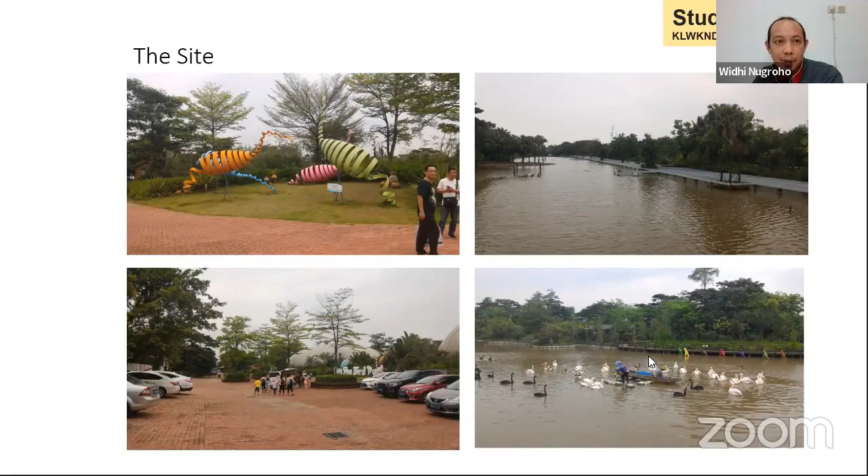So the design idea comes from the bird itself. I'm thinking about how to represent the building and the site and the bird park at the same time. So the design idea is transforming from two birds hugging each other, and these two birds symbolize the good relationship between Indonesia and China, because the furniture, the craft come from Indonesia but are shown in China.

So I'm thinking these two birds become one, one unique building shape. So you can see the transformation of the design idea. And this is the initial design sketch form. We try to start with the sketch, so we can see how big the building is, how many stairs, something like that.

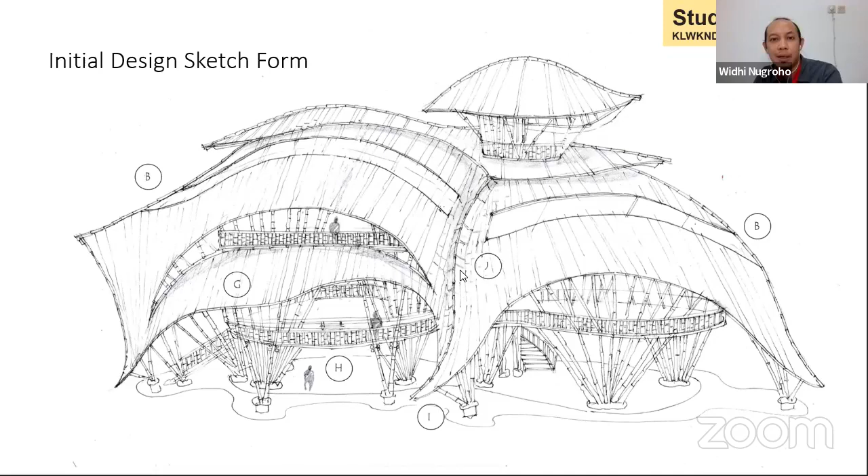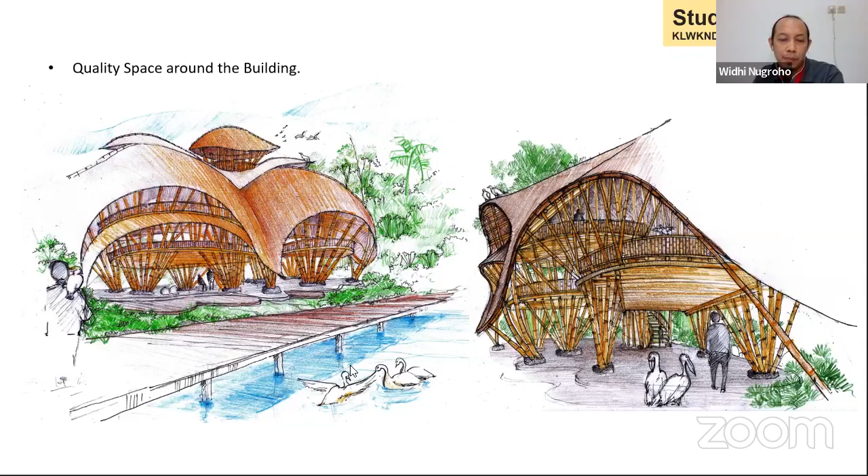And this is the rendering sketch model. You can see the hugging birds become the building design. In this sketch, you can see the staircase directly into the second floor. We made some sketches to see the quality of space around the buildings. Basically the building is beside the lagoon, very close to the water, but we have enough distance between the water and the building.

And this is the second floor. The main entrance goes directly into the second floor. You can see the furniture layout here. This is the tower in the middle with the staircase around it, and this is the balcony, and you can see the furniture layout with the floor patterns on it.

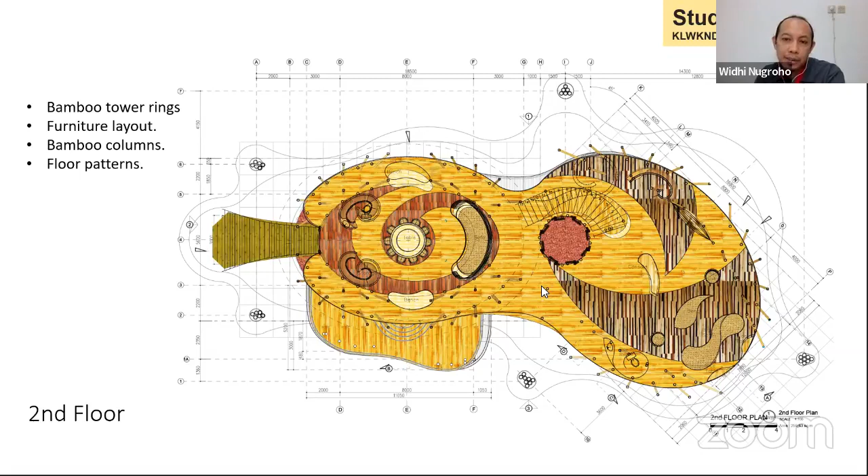So these are the sections. You can see how big the building is. The top is about 21.5 meters, and you can see the staircase into the second floor, and in the middle is the tower. In this area, the staircase is outside the tower, and in this area, the staircase is inside the tower. You can see the human scale here.

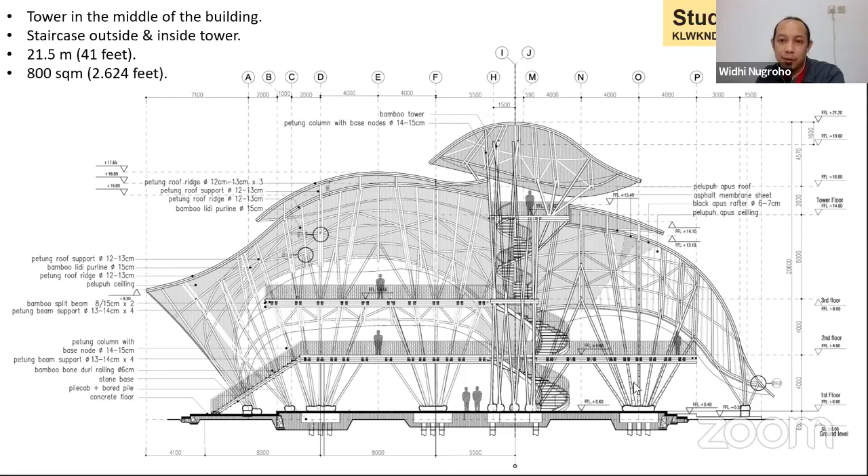We have a structural analysis also, and in our design team we have a bamboo civil engineer, a bamboo specialist. He calculates all the wind load, earthquake, and also the building load itself. This building is designed to withstand wind of 120 kilometers per hour. So it's quite a strong structure.

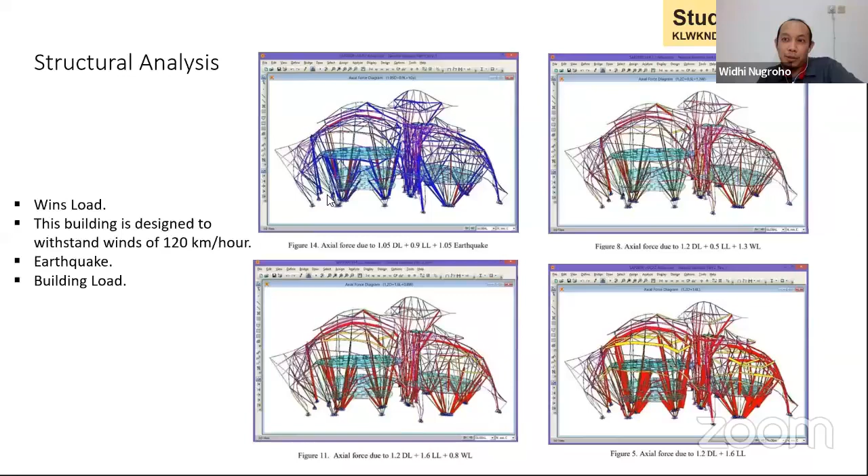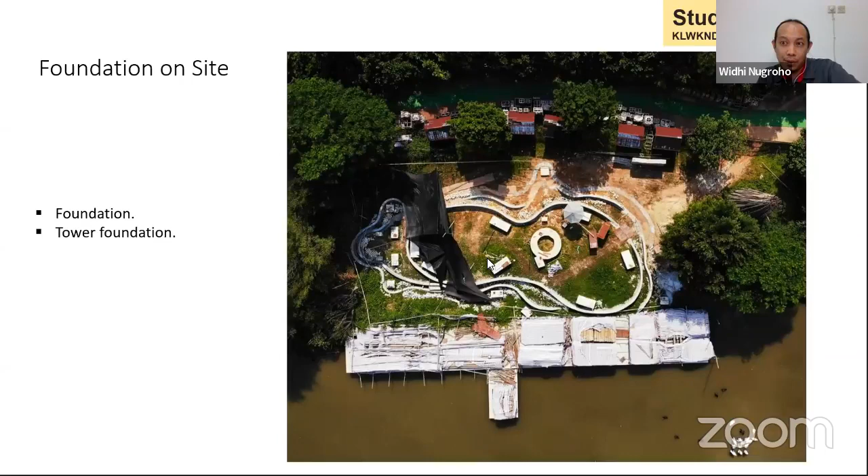Yeah, these are the foundations on site. So you can see the foundation tower in the middle, and this is the floor foundation. It looks very organic, and this is the construction process.

Yeah, I think the construction process is a very interesting part, and I would like to show you how this building started from the first until finish. So they start from installing the split beam here, and after that the columns. Usually in conventional building we make the column first, and after that the beam.

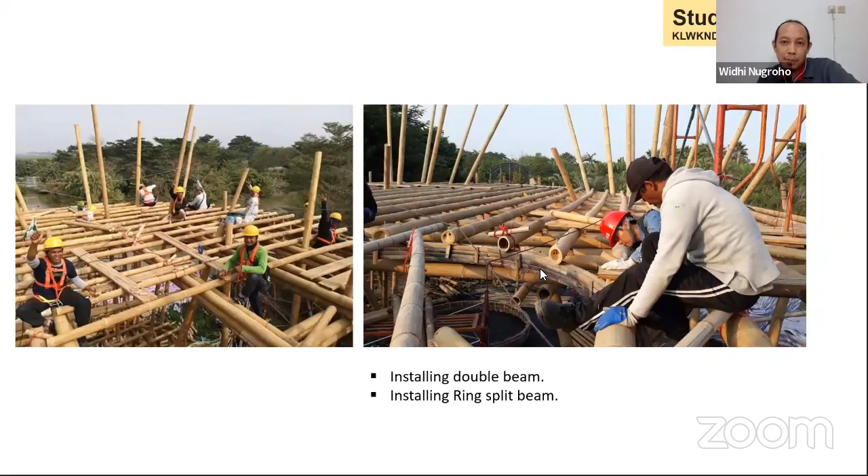But in bamboo construction we use a split beam first, and after that we install the columns. So this is the column, and this is the split beam. It's a double beam. Yeah, it continues with the columns. This is the worker installing the roof support beam.

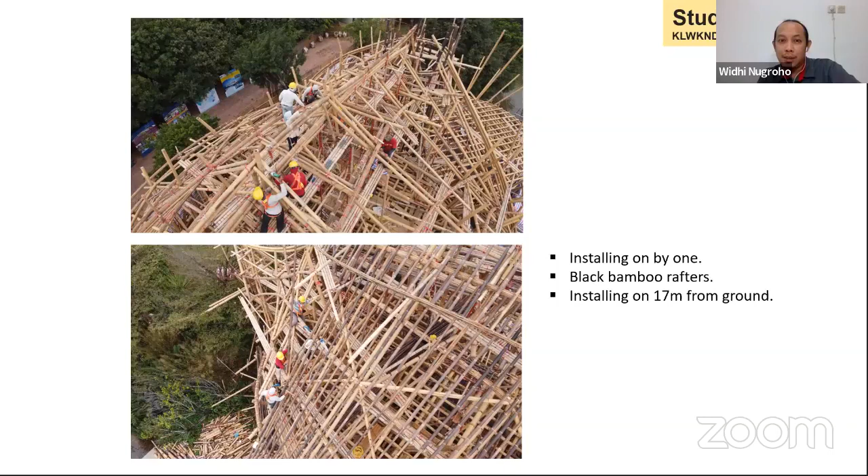Yeah, you can see this building is very high, 21.5. So yeah, at this point it is around 17 meters from the ground. So you can imagine how tall this building is, and there are no special tools to erect these buildings, just manual, one by one. And yeah, you can see the backbone of the bird, this, and these half structures.

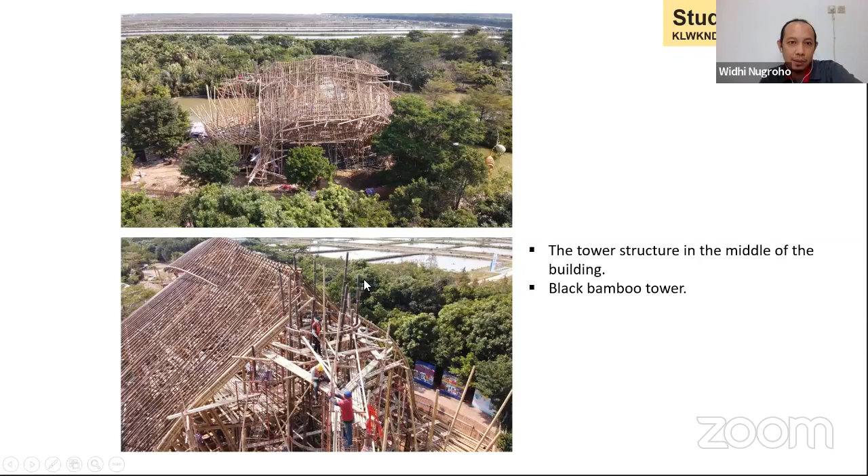So you can see that the tower in the middle starts to be constructed, and we use a black bamboo structure in this tower. And yeah, this is the top of the roof. This point is 21.5 meters. And yeah, this is the bird's head.

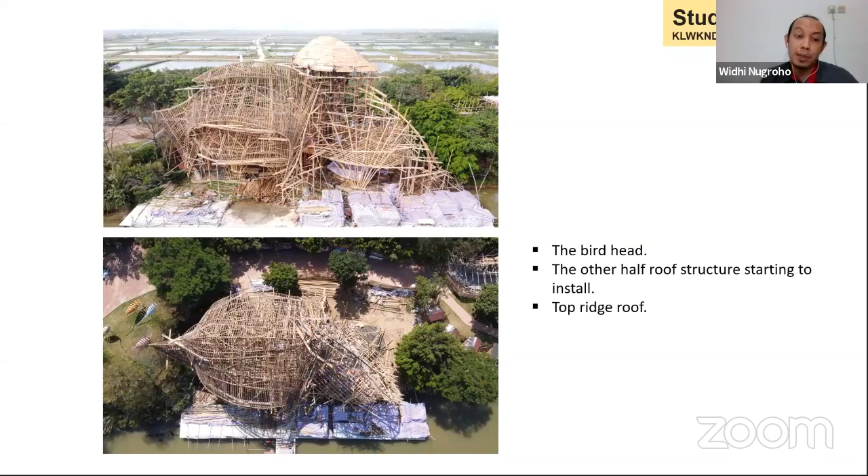And we have a double roof because we try to reduce the wind load when the wind flows into these buildings. So the jack roof is our design to reduce the wind load. Yeah, then it starts for the roof. We use a bamboo roof, and this is the roof rafter structure when it's complete.

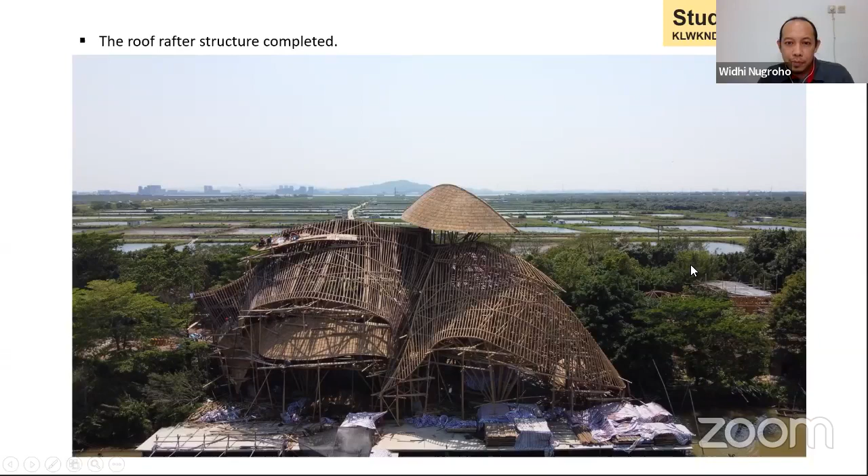So you can see around this building. This is when the bamboo roof is complete with a skylight. This is inside the building. Bamboo skilled workers start to install the roof finish, cover, and the skylight. You can see.

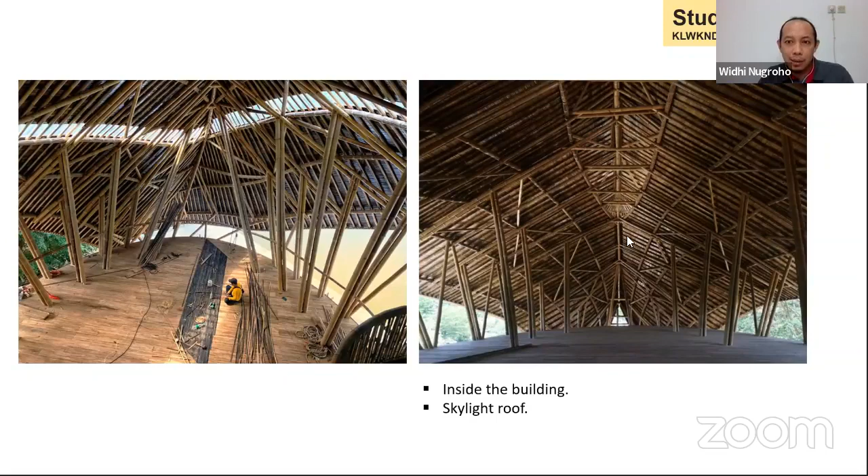5 minutes, Widhi. Thanks.

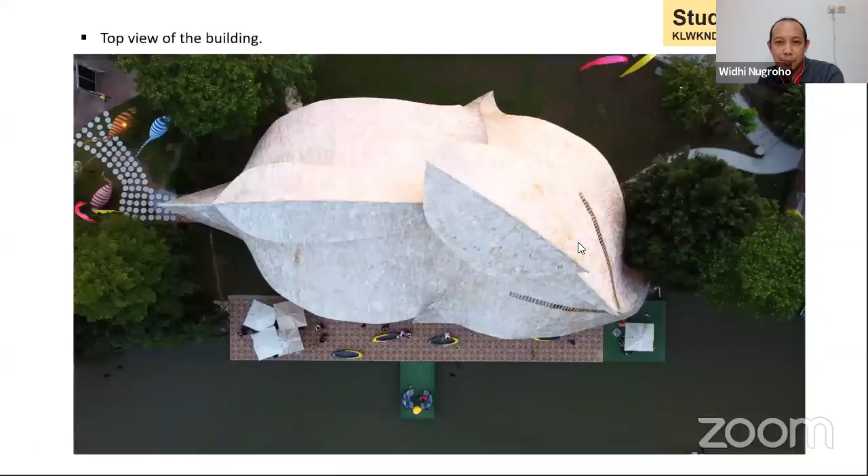Okay, this is the finished construction. Yeah, this is a different side of the building. This is the bird's eye view. It's the top, so we can see the shape of two birds with one head on the top. Yeah, this is the entrance into the second floor. And you can see the staircase around the tower.

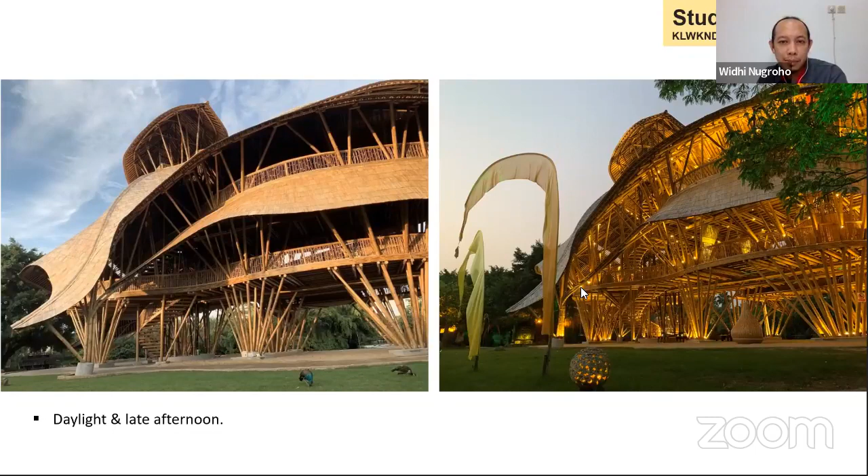Yeah, this is the difference between daylight and late afternoon. We played with simple lighting for these buildings. Yeah, a big roof, because we need to cover all the bamboo structure from direct sunlight, the rain splash, and also to reduce humidity. We use a sun floor here at the ground floor.

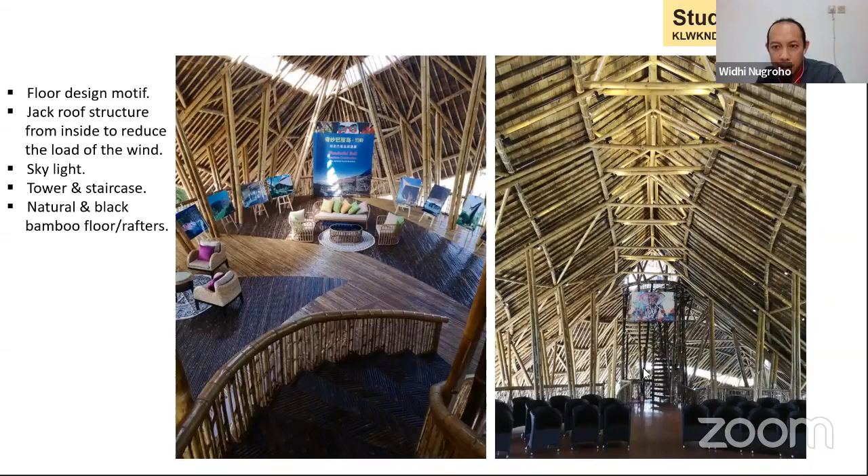This is the inside of the building. It's the jack roof, the tower in the middle. This is the floor design motif with black bamboo inside. That is at night with the full moon.

Yeah, talking about the future of bamboo architecture, I think there are some notes from me. It's easy to use and low tech for remote areas. I mean, bamboo architecture needs no special tools, and can be used in remote places or in situations of natural disaster. I mean, in the Southeast Asia context, because there are a lot of natural disasters in Southeast Asia, and I think bamboo can help us build our new environment after a natural disaster.

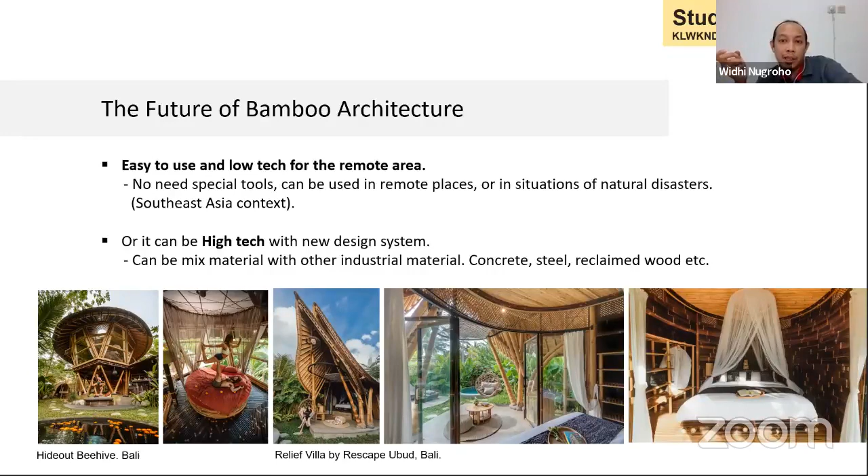Or it can be high tech with a new design system, and can be mixed with other industrial materials like concrete, steel, reclaimed wood, or any other materials. And also the durability. A good bamboo preservation system that is more economical, inexpensive, and easy to buy. Because sometimes the boric acid treatment is quite difficult to get. Yeah, I hope we can get it more easily.

Maybe there will be a discovery about a bamboo coating resistant to the rain, direct sunlight, and also termites. And bamboo buildings need to be easy to maintain, with a simple design with emphasis on function, smart design bamboo buildings. The building can be mass produced everywhere and affordable. To reduce the building costs, we can mix materials, like I said. We can use local material, local bamboo. If you have a garden, maybe you can build your own house.

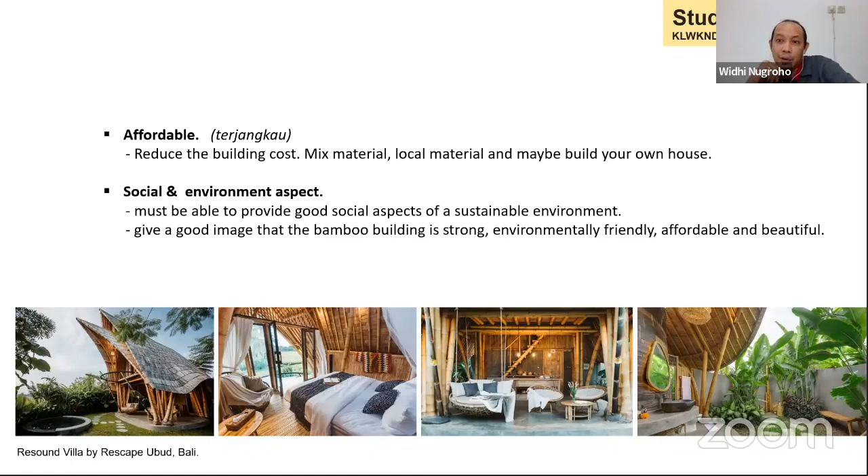And yeah, also the social and environmental aspect: it must be able to provide a good social aspect of a sustainable environment, and also give a good image that bamboo building is strong, environmentally friendly, affordable, and beautiful. Yeah, thank you. Thank you, Eugene.

Thank you, Widhi. Yeah, thank you for that. If you can stop sharing your screen, that'd be great. Yeah, I'm stopping. Sorry. That's okay, no problem. We are not in a hurry. We have got all the speakers. I think we have Jamie online as well, waiting. We have Markus and Mauricio as well. So that's good. You cannot unshare, yeah? I don't know how. I mean, I have a problem with this. Okay, I'll see if Yao Sheng can do that. Yao Sheng, can you unshare? Help me? Yeah.

While we are waiting for that, it's really good to see a building, and quite a big building. It's 4 to 5 stories. And Widhi and his team from Bali managed to build this in Guangzhou, in a bird park. I'm sure you have a lot of questions. For the audience, please put that in the chat and we'll filter that as we go through the 4 speakers and try to answer your questions.

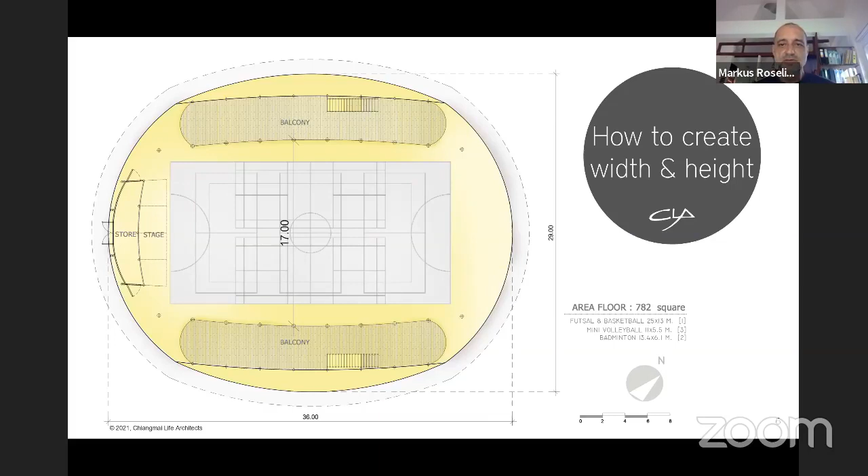At that time, in 2016, we looked all around the world at what others have done. For us, it always starts with function, a very conservative way to look at architecture. Function always comes first. And for us, science is an important aspect. I'm a doctor of natural science, it's in my blood.

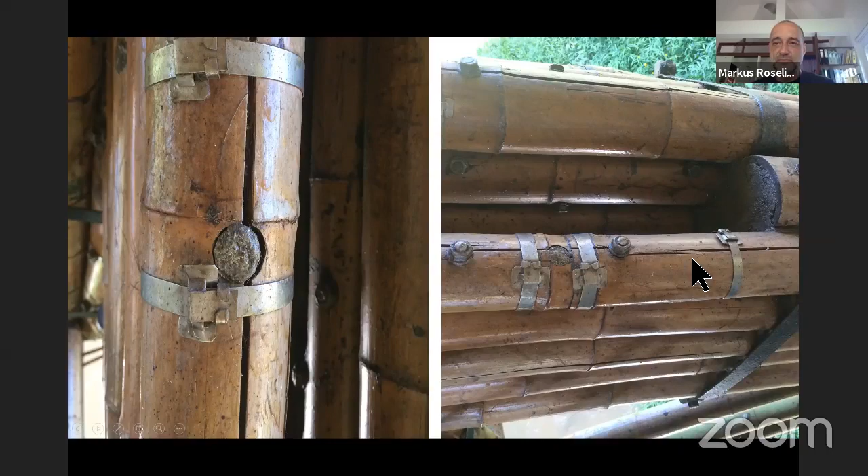We saw basically the same happening there. Whenever you do this kind of connections, the bamboo will crack, and after some time, it will look something like this. And so for me, aesthetically and also from a structural point of view, this was rather unsatisfying.

Don't get me wrong, I'm not saying you cannot build with big bamboo, and all those people who build them, sure, they have developed other things, they go further, but my way of looking at things is just different. Also because I am not so much a square guy. I don't really like little boxes and square designs.

And I was sitting in this blues concert one day with great music, but a terrible acoustic. So I looked up and I saw that building was made with steel trusses and had a metal sheet roof. That's why the acoustic was so bad. But when I saw this, I thought, that's a way maybe we could go.

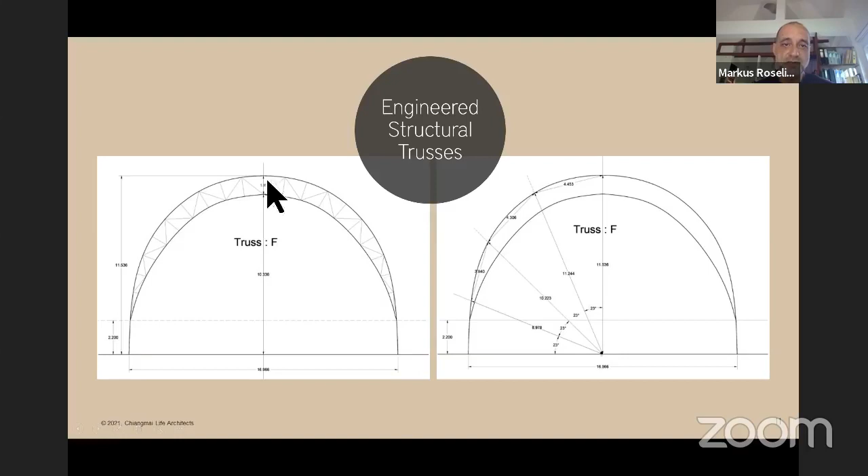So I asked my structural engineer, what do you think? And he said, yes, the main question here are these round beams. How are we going to do these beams to make this really strong and withstand all the shear forces? So we came up with these bundles. We bundle bamboo, and then we connect it with bamboo dowels in all kinds of different directions.

And we have this kind of bamboo here in Thailand that has a very small hole and is mainly built of fibers. So bamboo, as you know, comes in two different kinds of forms. One is a tube with a big hole, and the advantage of a tube is like any tube, it's hard to break, it's hard to bend, it's a very strong form. That's why most steel structures are made in kind of a tube form.

So like this, we get around the problem of the connection where all the force is only in the end part. Because with the big poles, the end part is a thin bamboo wall that can split longitudinally very easily because the fibers run longitudinally. But if you connect them the whole way, then the force is distributed on the length of the poles themselves the whole way.

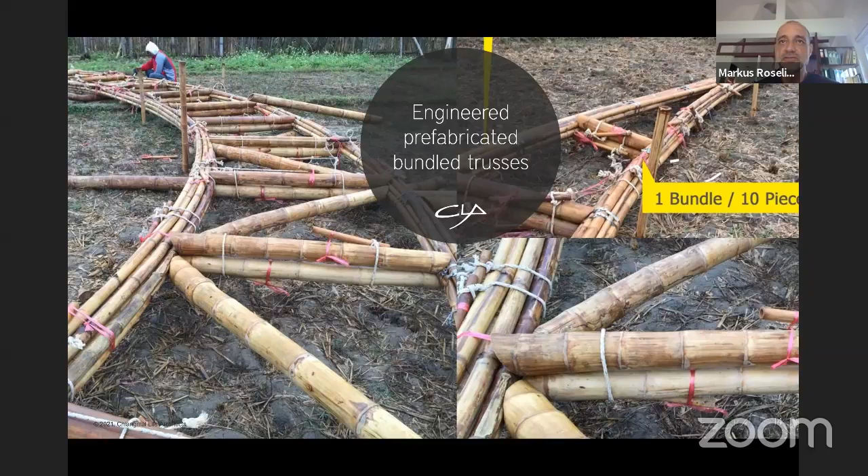12. And that's when the whole thing started, when we really realized what we were onto, because suddenly everything became understandable, reproducible, and explainable to everyone. And as Vidi also said, of course, he had to take into calculation wind forces, earthquakes, the load of the building, and all that.

And once we knew it was workable, we started looking at how do we put these trusses together? What kind of trusses, the size of the trusses, and then how to put the roof on top of these trusses. Also always thinking about the human scale, that we would need these balconies on the side.

And because this was a huge leap of faith taken by the school and by us into a construction method that hasn't been done before, we engaged another engineer to recalculate and look at this again, Esteban Morales Montoya from Colombia, who has done a lot of work for Simon Velez, a very experienced engineer with bamboo, just to make sure that we have two different opinions.

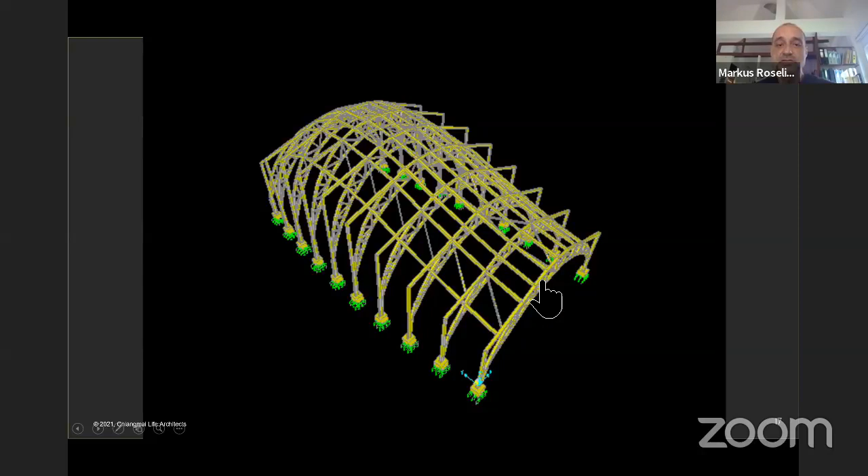And he then came up with, for example, this wind force simulation to show the maximum displacement that can happen and all these things. So we had a lot of data in the end that showed that what we were up to was most likely going to work. And then the design process could start.

And we like to design organic forms. We like to use nature as a guideline. And because it is a Buddhist school and the lotus flower plays a big role in explaining things in Buddhism, we used that as a starting point. And we put it on the side, and then we put the leaf flowers back into space to come up with the shape of our building.

And then we put this into the computer and looked at how this will flow on top of the building. And here you can see the outcome compared to the initial thought. We were getting pretty close.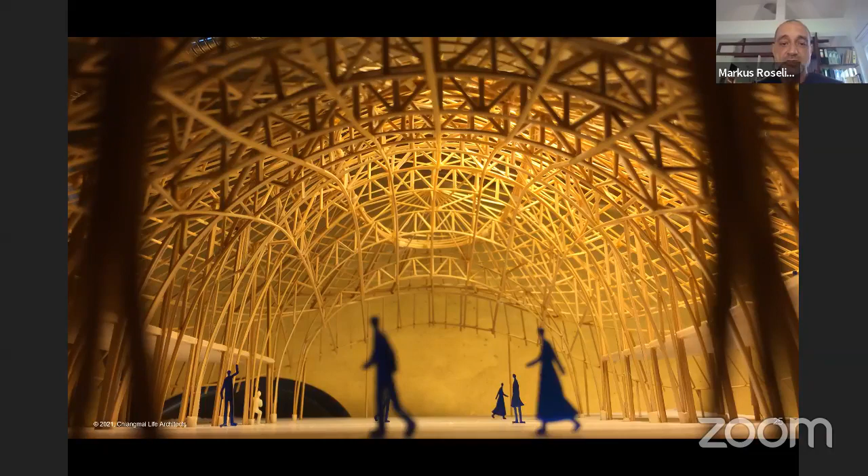Then, of course, like Vidi said, you need to make a model. There's really no way around the model. It will explain everything better to ourselves. You can find the weaknesses, and ultimately for construction, the 3D view of what you're going to do is very important. And in the model we could also explore more the human scale and see how this was going to work out in real life later.

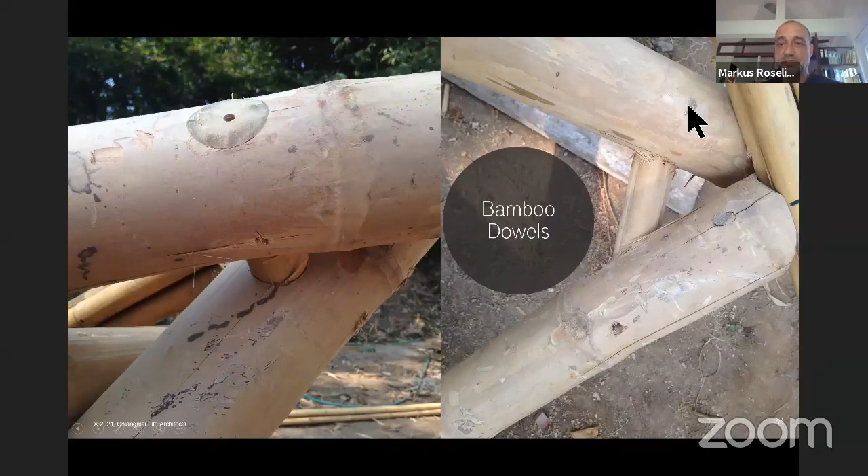So with the construction, we first produced all the trusses on site. And we used bamboo dowels, sometimes bigger dowels, and then these bigger dowels would be locked into place with some smaller dowels here. And sometimes we had to use some steel cables where the force would bring the trusses apart very strongly.

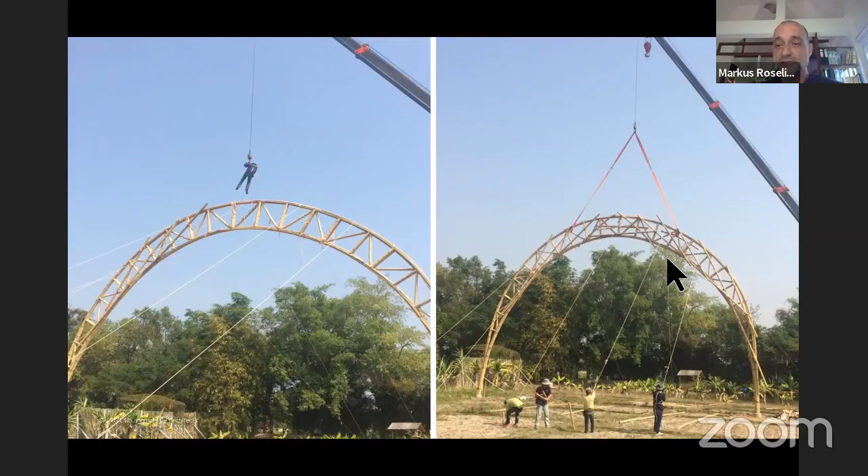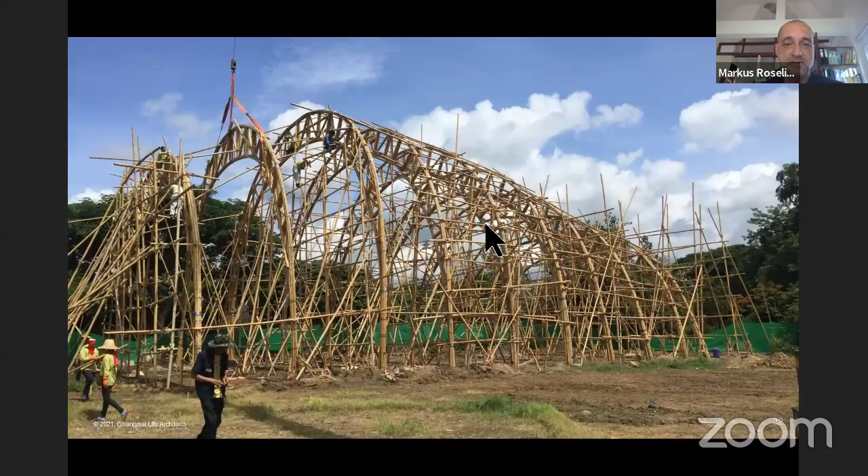And then cranes, and while we started doing our first crane lift, we realized that the trusses would bend a lot, so we had to reinforce the trusses just for transportation. Then they would be lifted. We prepared structures to hold them in place before we could connect them. And while we were putting them in, we connected all the trusses longitudinally to hold them in place. And then once it was done, there was a lot of bamboo going around.

When the structure was finished, we could start putting in our flowing roof forms and see how this would come together. So this is the base structure for the roof. And here's the outcome. As you can see, it is used as an assembly hall.

In the middle is a sports floor that is also made from recycled tires, little rubber balls, with a finishing on top that gives it the same color as the rest. We always look at being as sustainable as possible. In the back, you see the stage. The stage can be lifted up, so there is a safer environment if sports are being played.

And here you can see the height of the building. It's, I think, about 17, 18 meters high. The whole building has, I think, over 900 square meters floor plan.

Here are the stairs going up to the balconies where you can watch from up there. Here in the back, you see one of those balconies, and then you see the opening space between the first and second roof layer is quite big.

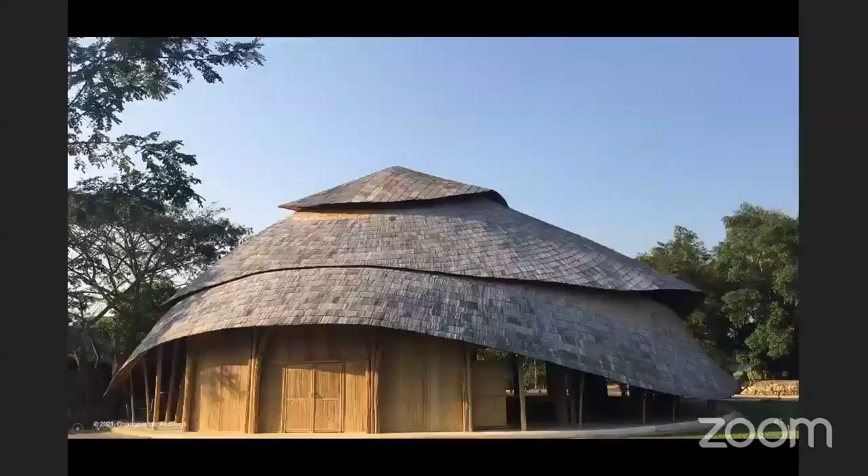Five minutes, Markus, thanks. Okay, so here's the backside.

Another design feature that's important for us is that we put things into the landscape and not impose them on the landscape. Here is another photo from the top - the whole school has grown, as Eugene said, quite big, and you see the hall has actually become one of the smaller buildings now. And then you need a very good photographer - this credit goes to Alberto Cossi, to make other people really understand what you've done.

So for the bamboo, our current situation, quick overview: the problem is the image, as we all know - that bamboo is non-lasting and a poor material. That results in legislation that doesn't really allow bamboo to do bigger things, and that also results in a lack of infrastructure.

Going forward, a big thing, very important for us because we like to do bigger things, is structural engineering. Without engineers, I think we won't have this expansion of bamboo that we see right now. The second thing that will be very necessary is material engineering, to look at different aspects of the bamboo, like fireproofing - how can we make it so that legislation has an easier eye on us - but also coatings, to make it more resistant against wind and rain.

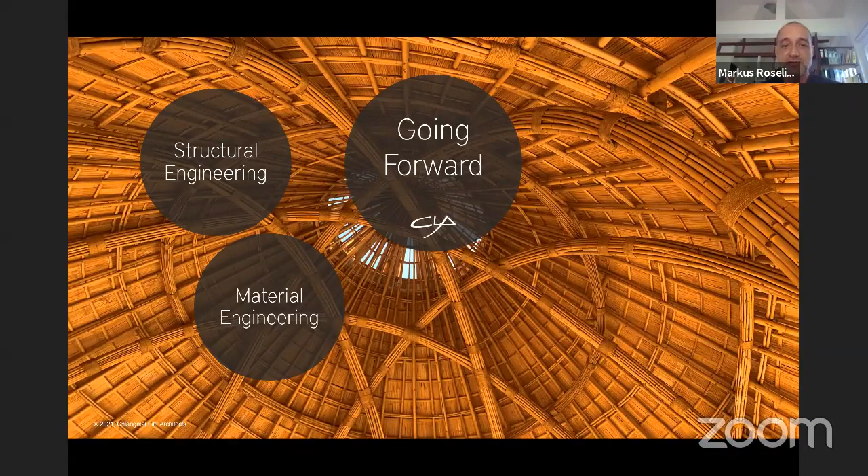Then we need many different visions, like all the different architects presenting today going different paths, because it's still small and we have to expand in as many ways as we can. Then we have to be sure there's enough locally produced bamboo. I think Malaysia takes a big step with the government helping to plant a lot of bamboo - in Thailand we lack in that. And then we have to reach out to existing businesses to connect it to other kinds of things that we cannot even think of right now.

Our path, ourselves, we like to combine and connect things. We like to combine science and art. We like to combine, as I said, natural materials with state-of-the-art engineering. Why am I so hot on engineering? Because everybody understands and believes that engineering is something we can trust.

If we can take the guesswork out of things, if we can make bamboo more understandable and trustworthy because some expert will say 'oh yes, that will work,' then I think we break a barrier where bamboo comes out of the hippie age into the normal life of many people. And important also is in the design part, we like organic design, but we still have to create a contemporary space feeling. Like with the room you see in the back, our science room, we have the most advanced equipment there, but it's in an earth and bamboo building. This is the kind of combination where we think people can understand and like it and see it works.

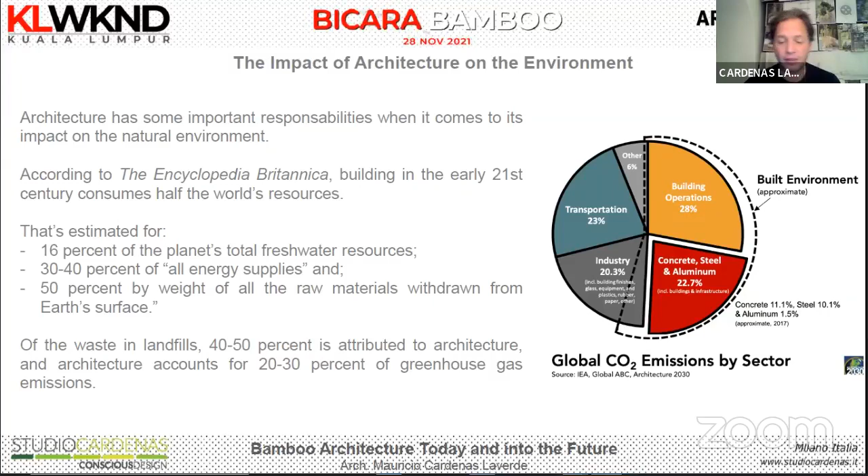Now architecture is not just a matter of making beautiful designs. We see that all our cities always look most similar one to the other. Shanghai looks like Milano, Milano looks like Kuala Lumpur like Bogota like New York, you know.

And so the future of bamboo, and why bamboo? Because it's a strategic natural resource that is contributing directly, just as a plant, just planting it. The plant itself is contributing directly to at least 6 of the Sustainable Development Goals adopted by the United Nations. So it is absolutely the material of the present and of the future.

The philosophy of my office is conscious design. That's the name of my office, of my studio here in Milan. We believe that consciousness, awareness, rather than sustainability, is the attitude with which to face the creative process of design. Because sustainable is a word that is being used everywhere, like bio, green.

Anything can be just called like that, even if it's not really like that. But consciousness, being conscious about something, is a word, a meaning that is more difficult just to play with it, to lie with it, you know.

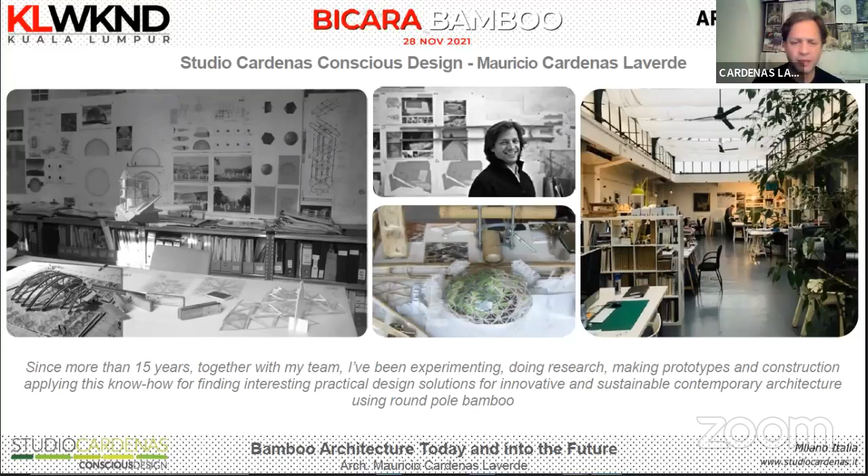My experience in the bamboo culture - I'm, as Eugene mentioned, part of INBAR, I'll explain a little later. We've been jury members in bamboo construction competitions and bamboo congresses in Ecuador, Beijing, etc. I've been part of the key lecturers, and I teach. I dedicate time for teaching, as it's very important to grow the bamboo community.

Last year, I'm the first Italian design ambassador working with bamboo, and I have been for two years, 2019 and 2020, curator of the largest bamboo labyrinth in the world, which is actually here in Italy, near Parma.

I wrote the first bamboo construction manual in Italian back in 2008, and wrote articles before that about vegetable steel, as Simon Vélez called this amazing material a long time ago. And for the Renzo Piano book, the Almanac of the Architect, he offered me the opportunity to write a chapter about environmental comfort, which is basically not specifically about bamboo, but about the use of natural materials, more specifically intangible materials.

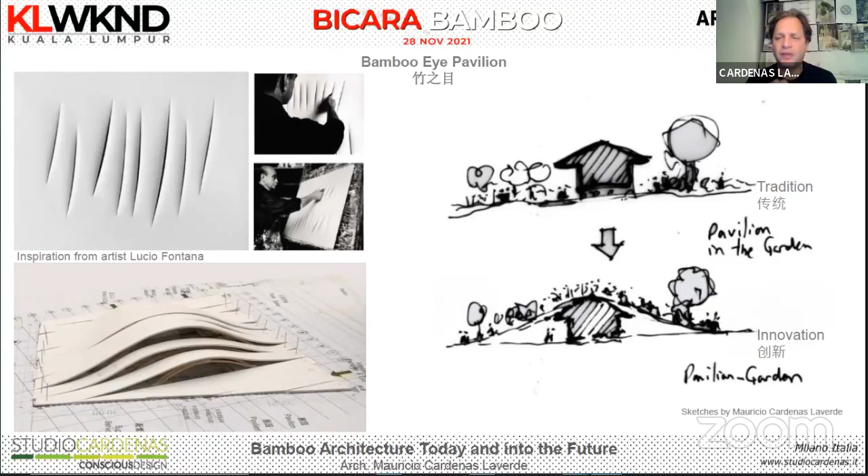Not a pavilion and not a garden, which means an object that is just placed on the garden, but that becomes part of it. And these cuts helped me to achieve this. So it's a building that actually becomes part of the place. It's not only a bamboo structure, but also it's a contemporary architecture.

It's the architecture I envision that will come into the cities, because it's in the cities where we create big environmental problems. And it's the place where my office designs from. So as you can see, the pavilion integrates in the ground, and the process of design is very

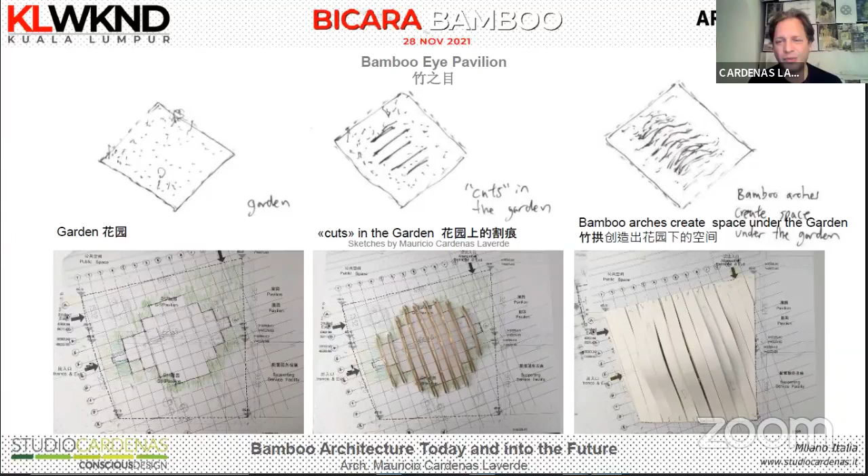architectonical, right? We do sketches, we do modeling, very creative. As you can see, this little model was a concept model, but this model traveled to Beijing to present the project. It was a private competition, which luckily we happily won, and these sketches were my first sketches. They already talked about what the building was going to become.

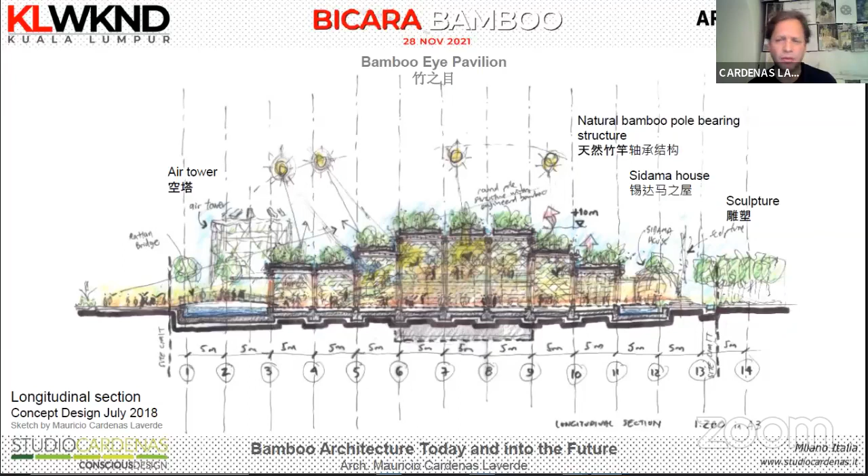So we went into natural light, a building that uses natural light all through the day, and natural ventilation, with no air conditioning, based on form, proportions, and the use of materials. As you can see in these sections, we don't use concrete, not in the connections and not on the roof. The roof is soil, is earth.

And this is what happened with this project. Being consistent and coherent doesn't mean to be stubborn. We accepted the changes, and the changes during the design process with the engineers and with the client were all included, but the concept was always there. The spirit of the project was there. These are the meetings with the client.

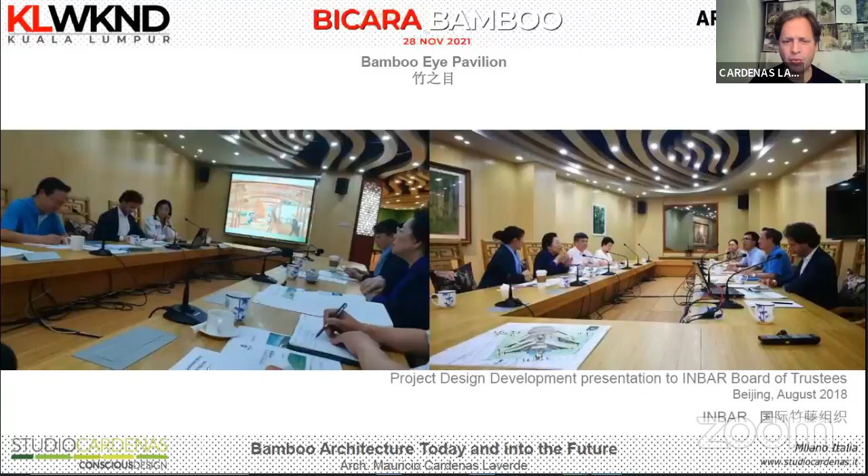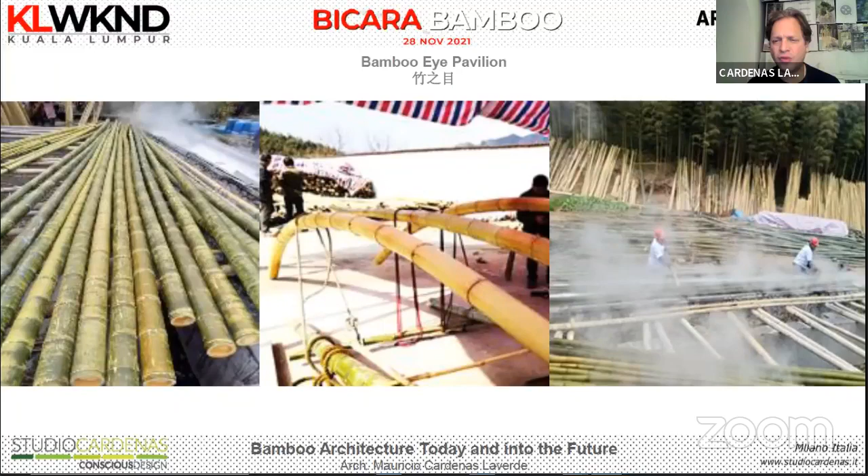The process of working with bamboo is so beautiful, because instead of being inside a concrete construction, humid, cold, gray, we are in touch with nature from the very beginning. And the bending of the large bamboos, we used large bamboo poles. We resolved with design the problem of connections. And you can see that these arches, even the scaffolding and the stairs used by the construction company, were made of bamboo.

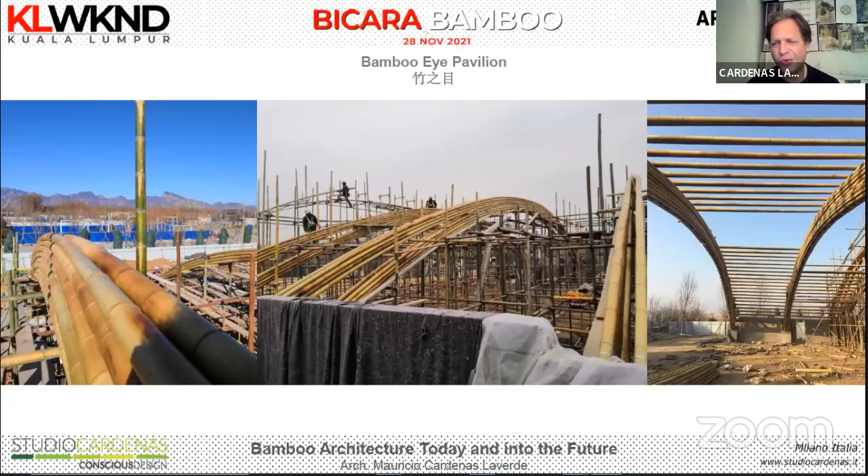And during the construction process, as I was mentioning, it's already warm and welcoming, right? So sometimes I even wanted the construction to go slower, because I really enjoyed walking and being in and watching the process of the construction.

So the architectural language we're keen on in my office is a language which is clear, is clean, and is looking forward to becoming part of the cities in the world, right? Because the most beautiful bamboo architecture now is done in the rural areas, and we need to come into the city, as bamboo does, to kind of infest the cities in a positive way.

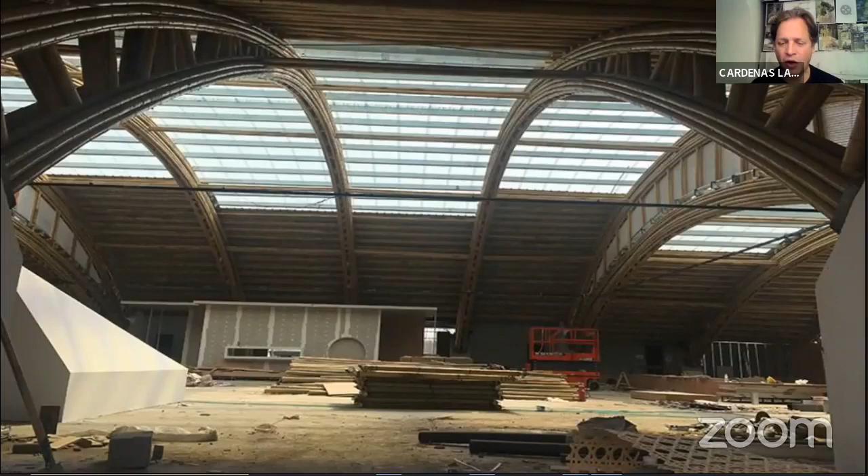Bamboo is an infesting plant. It's not a tree, it's a plant, as probably most of the public knows already. And so, to infest the cities with its beauty and with its incredible possibilities of making small, medium, and large-scale architecture. We also used bamboo as a finishing material. Here you see, for the false ceiling, this weaving.

The weaving is traditional. We can see it in many places, even in Italy, this weaving for making baskets. In Colombia, where I originally come from, we do all of these weavings. And in China, of course, I found this capability of making amazing weaving, and we just enlarged the scale of the weaving, and with this we achieve control of the natural light. So the natural light comes inside in a warmer way, and also in a controlled way,

not so strong and direct, right? The proportions. Five minutes, Mauricio. Okay, thank you.

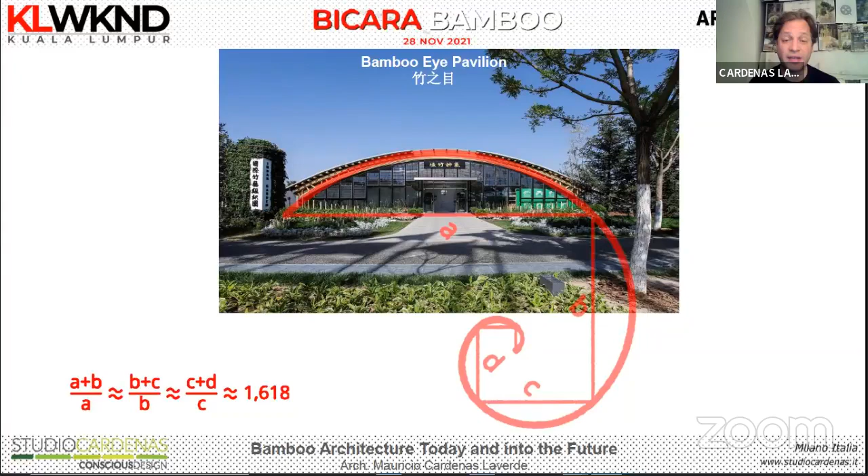So the proportions are that of the classical architecture that comes from ancient times, the Fibonacci proportions, and you can see the glass facade is a very important part of our architecture, looking forward to push bamboo architecture into the contemporary field, right? So the facade, it's an open glass facade, and it's called Bamboo Eye because of the reflection on the water.

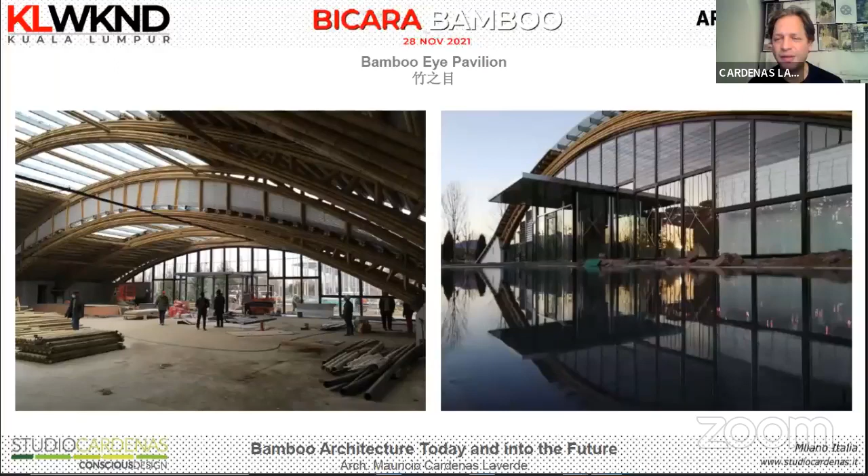It was not a name. The name was given by the public, actually. I thought of it as the bamboo garden pavilion, but everybody started calling it the Bamboo Eye, and I thought it was much more beautiful and poetic, in fact. So the glass facade that I was mentioning to you is very important in our project.

Today we're focusing on this project, but if you checked our designs, we design buildings that have facades that are completely closed, not in tropical environments. They also are designed for the weight of the snow and for being in the four seasons environment, right?

So here you can see that these glass facades are openable when necessary, so to allow the breeze to enter. Only the upper part of the facade is openable, so that the wind would not bother the persons inside, or it can be directly over the heads where the warm air is, and should be pushed out of the building.

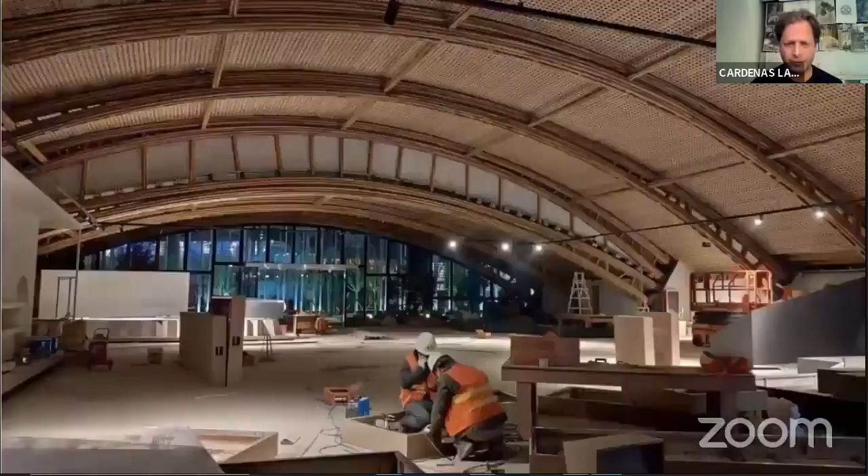As you can see, the contrast between transparency and natural materials is amazing. It's very beautiful, and this building can actually be in any urban environment, and this is what my office is dedicating efforts to: bring bamboo architecture into the cities, as I mentioned before. That's my vision for the future.

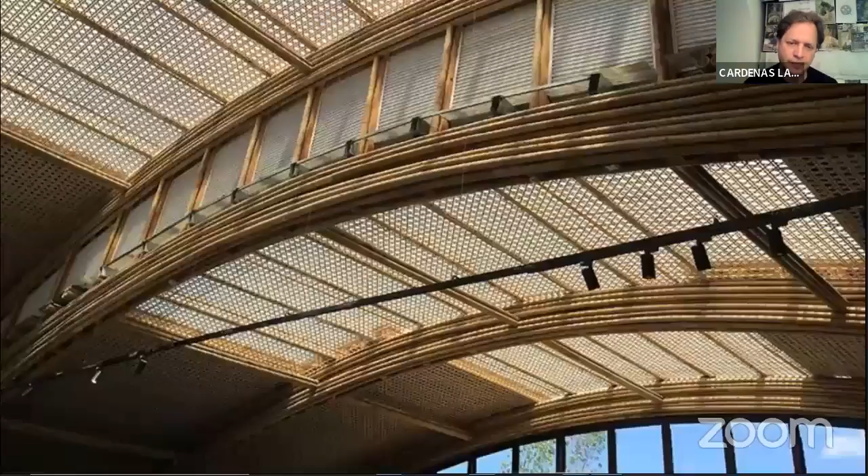And you can see here the detailing. You can see the connections are reinforced in order not to include concrete in the connections. We used engineered bamboo so that it can hold the bolts without including concrete in the connections. Other views of the structure with this natural light, and the garden is also with bamboo plants.

It represents the International Organization of Bamboo and Rattan. We do some 3Ds as well, of course, for working and communicating the project.

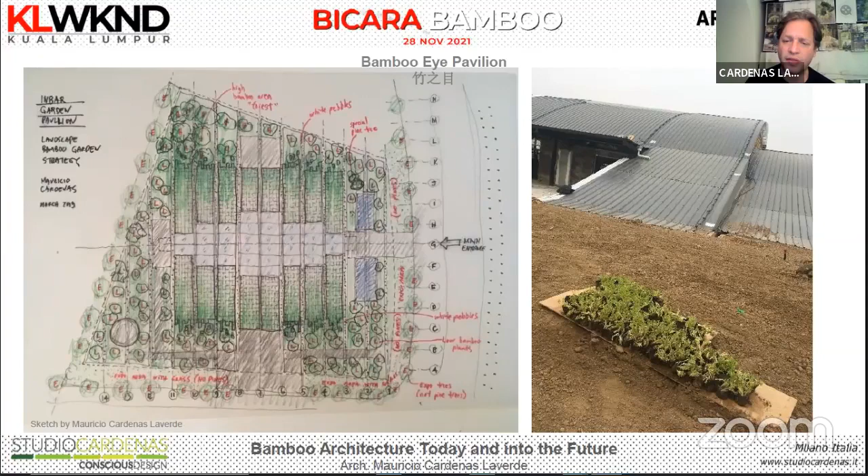And here, as I mentioned, the roof has no concrete, so it's the steel deck directly with earth, and the earth offers the project the necessary weight to control the movement of the bamboo structure, because bamboo moves a lot and it should move. It's its nature, but we just have to control it. So the roof is a garden.

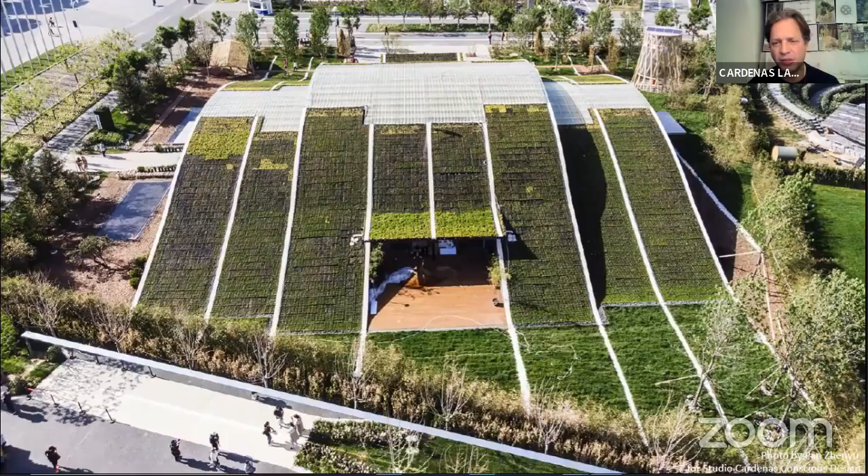It's not a roof actually, and this garden, the wet soil and the plants are a very important natural material for the strategy of thermal control. This is the view from the top. You can see the skylights, you can see the garden. It's walkable, but during the expo, we control the amount of people not to ruin the garden, of course. Some views from the top and the connection with the earth. It's a building that takes from the earth, but gives back.

So very quickly, it's a 54 meters wide and 40 meters long structure. The largest bamboo arches have a span of 32 meters with a height of 9 meters. The Vierendeel truss type of arches make the structure very light and strong. We use more than 5,000 Phyllostachys pubescens, the species called moso, which is very common. And the poles are around 10 centimeters in diameter and 4 to 6 years of age.

As I mentioned, we design projects for the four seasons with high-performance facades, and here are the last views of the project before concluding. And my conclusion, as I mentioned, I made part of the presentation. So the future for bamboo is making buildings that are more sustainable than the most sustainable buildings we see in the cities today, and that are more contemporary because they use natural materials, tackling the construction process, not only the life cycle of the building.

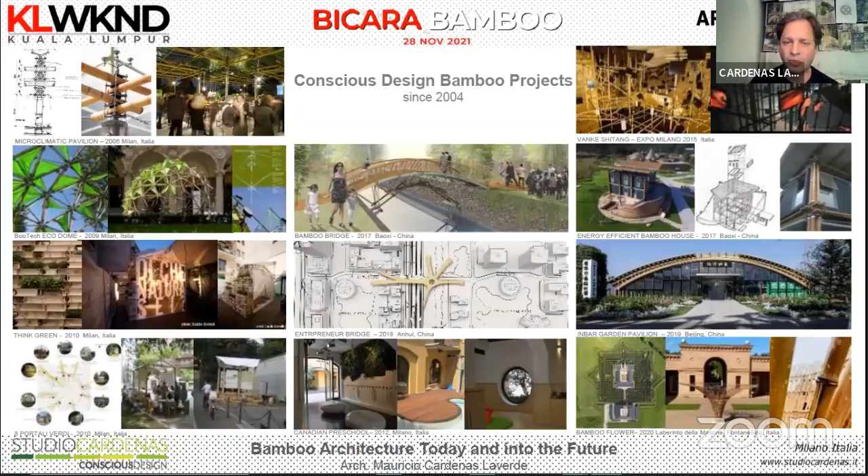Thank you, Mauricio. Good presentation. I'm just waiting for travel to open again to visit your building, and also WEDI's building. I think these two are the ones I haven't visited. And also Jaime, when he comes to speak, so much to see and to learn from you guys as well. I agree. I would like to travel to and see all of your buildings very soon.

As Mauricio says, the bamboo world is still small. But the proponents have got big hearts for bamboo, right? We are all very passionate and we want bamboo to grow. We want bamboo to succeed. We work in our own sphere, in our own sectors, and try to promote it outwards. And there's still a lot of work between all of us to come together and bring this wonderful material out there into the mainstream. I call it shooting bamboo into the mainstream. I think we all have to make the effort and get that going.

Some of these buildings you see, in fact all of them, are actually pushing the boundaries. And for the next 20 years, this is what we're going to do, right? We have to pull it through, get people to accept, approve, and appreciate bamboo. I think that would be great.

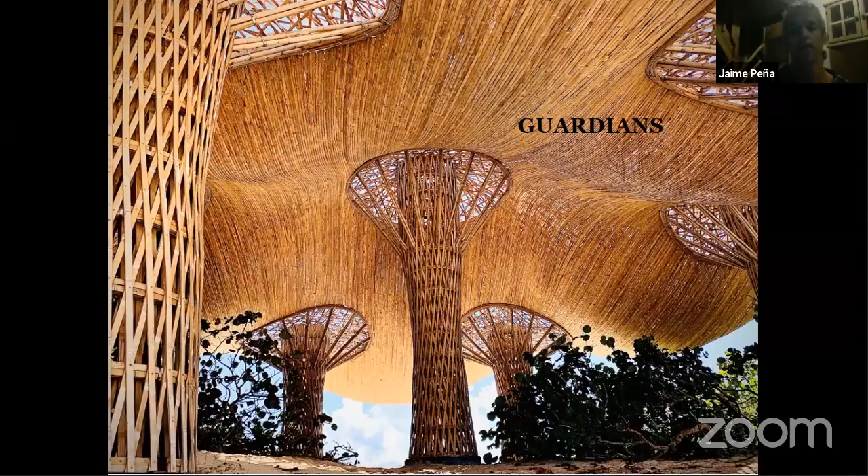For example, we are working in Tulum in Peninsula Yucatan, and we have here a lot of hurricanes, very, very aggressive hurricanes, you know. All the time, the architects and the engineers are designing to protect from the hurricanes. But how is it possible to flow with the hurricanes and how is it possible to understand better all this information from the hurricanes? So with these kinds of projects, we are working on that. I will show you more with the slides.

This project in the design process was very intuitive, you know. The bigger analysis that we did about the project was to understand how the hurricane operates, how is the geometry of the hurricane. And we flow it with the nature, with the landscape in the context. These projects are in the big hotel, you know, these kinds of hotels with big blocks, with many rooms. But the owner of the project wants to create spots around the hotels, but organic spots, to create contrasts and elements like sculptures, you know. The most important thing for them is that this project looks like a sculpture, a bamboo sculpture.

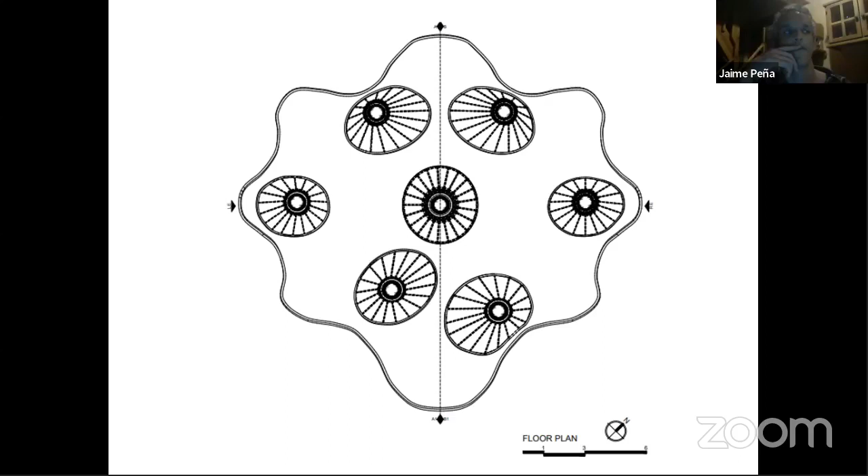The name is fractality, and the fractality is very important in this kind of architecture because this architecture is like parametric architecture and is designed from surfaces, you know. You have surfaces like an egg or like a leaf, and in this surface you create like a grid shell, and the name is diafragma structural. It's like a skin. Imagine your body, guys. You have your bones like a main structure, but for your bones to have good functionality, you need the skin, no? Need the meat, need all the system, the dermis, epidermis, to join all these elements to the structure.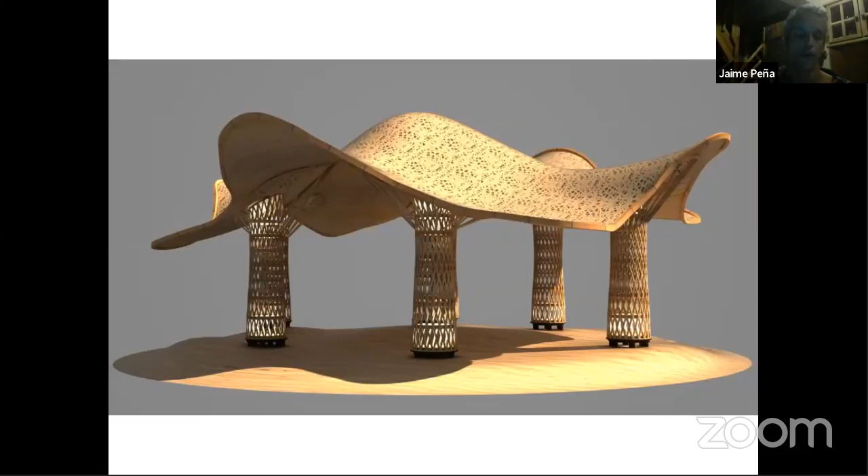This is some elevations, but very schematic elevations. The rendering for us is very important because we work with Grasshopper and with Rhino because it's a parametric architecture. And the relation between the mathematics and the geometry is very important. Right now with the technology, we can use these elements to create the form finding, to understand the winds, to understand the hurricane, what is the very geometry to receive the hurricane. It's like to create a highway for the hurricane. It's very interesting. This is another section.

So how is it possible to build this kind of organic architecture? How is it possible to flow with the organic geometry for the elements like the hurricanes with bamboo? Understanding that the bamboo is a giant grass, understanding that the bamboo has parallel fibers, you have a fiber from the roots until the top, and you can extract fiber from the bamboo poles. And it's a very interesting system because it's fractality as well. It's possible to get one fiber, but with many fibers working together, you have beams. You have a very interesting structural system like the diafragmas estructurales.

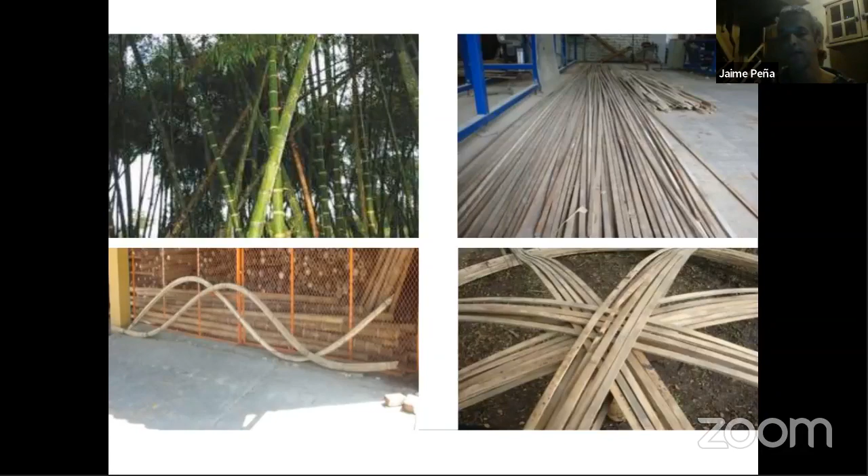And the thing is to understand how the universe operates. In the universe, all the operation is in collaboration, you know, it's fractal, it's in collaboration, all the nature makes this work, and why can't we get this information and apply it in the architecture? So now we know how it's possible to create these beams of these elements structurally.

Sorry, we are living in Mexico. This project is in Mexico. Mexico has different kinds of bamboo. We have Guadua Angustifolia kunth. It's not native here. Some people many years ago went to Colombia to get some nurseries and came to Mexico and made different plantations.

We are working in Chiapas, in Palenque, with different plantations and natural forests as well, but in other species, in alliance with a little enterprise, but very interesting. The name is Bamboo Maya. They are in charge of the harvest, to make the selection in the forests, to speak with the farmers, to teach the farmers the best way to cut bamboo, to protect the rhizome, to protect all the plantation. Because for us, it's very important to understand all the process in the bamboo.

It's not only to design bamboo architecture, it's not only to build bamboo architecture. We need to understand what is the mission of the bamboo here on the planet, how the bamboo operates in the forest, why everyone loves the bamboo, and why the bamboo has all these qualities and these capabilities. I mean, it's very important to go to the forest, to touch the bamboo, to talk with the farmers, to cut the bamboo, to understand that you need to make a good cutting.

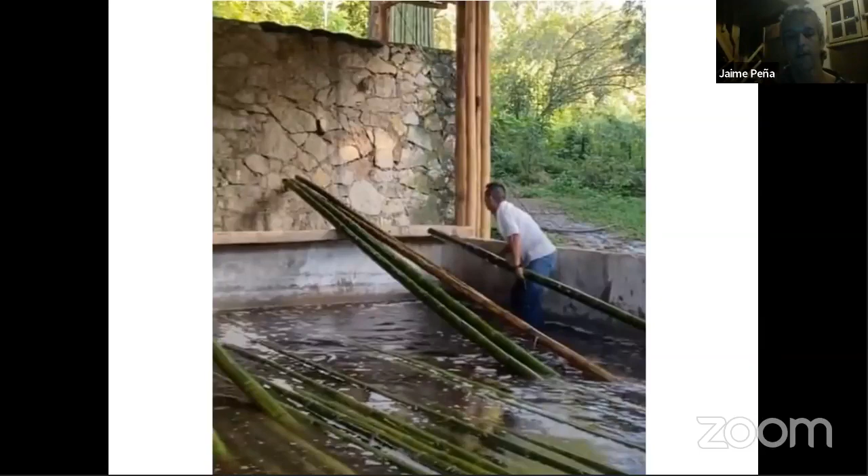These are the farmers, the people working with us in Chiapas, in Palenque, and we create a support for them, like an association, to improve the economy, to improve many things in their lives. This is the warehouse where we did the treatment. We are cleaning the bamboo from the forest. We have a lot of trash around, leaves. This is the pool. We are using sal de bórax, ácido bórico, and pentaborato for immersion for 5 days. And we have the beautiful bamboo poles.

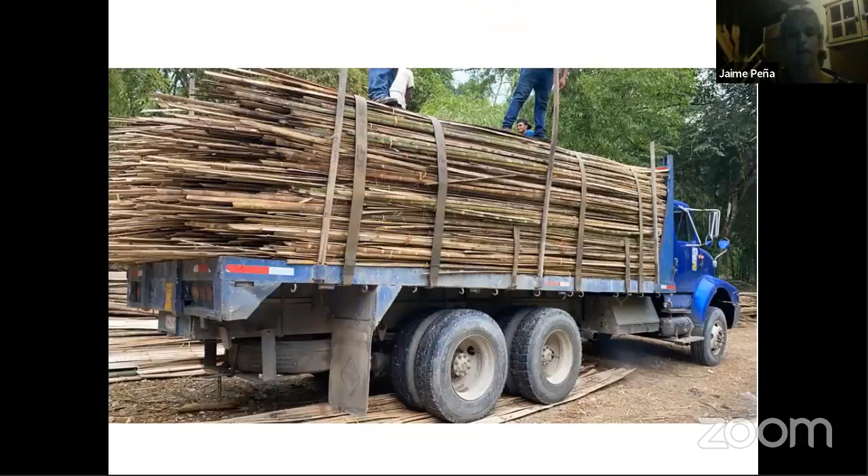But remember that we are thinking in fibers, in splits. And we have a process as well in this warehouse with some machines to create many splits, because we are using a lot of splits in each project. So we need to teach people there in Chiapas the better way to make these splits. Now we have them ready, put in the truck and coming to Quintana Roo. The way is 12 hours on the road, and they arrive in our workshop ready, the splits with good dimension, with treatment, with good quality bamboo, Guadua Angustifolia kunth.

And in our workshop our process started. This project was prefabricated in the pillars. For us, it's very important to have our workshop, our warehouse, our fab lab, because we are working in innovation with bamboo architecture. And it's very important to have this space to research, to make tests. And some architecture is possible to make as prefab architecture because of fractality. This pillar is made of many rings, 2 or 3 different dimensions. It's a fractal. It's possible to prefab the rings in the workshop.

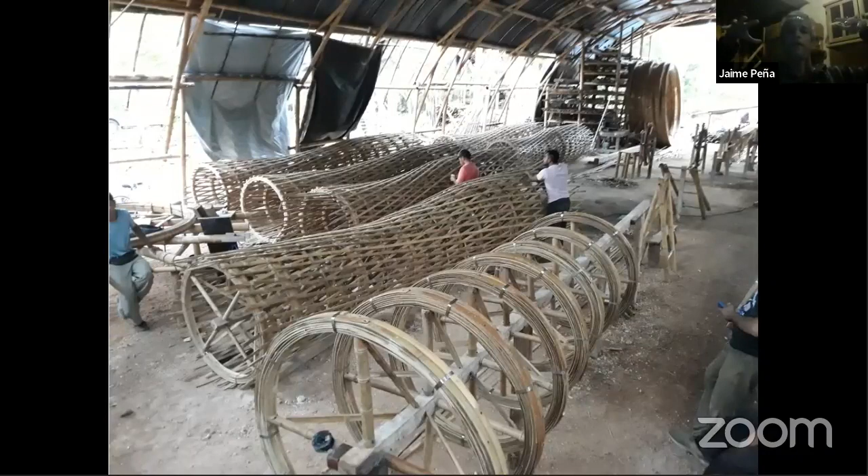This is the image in the workshop with the 7 pillars that we created, like 7 guardians. The Guardians project is 7 guardians that are protecting this beach and making this connection between the beach and the interior. And here we are working on the guardians, the pillars, like a big spirit. And this is our fab lab here in Mexico.

Some details of the structural system: each pillar is like a reciprocal tower, but made with the splits, more like parametric pillars, columns. You have different layers, like skins, to make a union for all these forces between the rings. It's a continuous pillar, and you have some layers outside the ring, and other layers inside the ring. For us, it's so beautiful to take this process in the workshop, to understand the sacred geometry, the universal geometry, to understand how you can get this information and put it in a beautiful bamboo project.

This is the transport with our little trailer. And this is a beautiful view of the interior pillar from the beach, because this project is in front of the beach. It's very interesting because here in front of the beach you have a lot of risks for hurricanes. You are in the middle of the beach, and at the hotel, it's sand.

It's impossible to make foundation with concrete, so we are using timber pillars and make holes, put the pillar inside and make pressure, like palafitos, for example. Up the palafitos we create a little deck in madera as well, and up the deck we put each pillar and make a connection between the bamboo and the deck. This is the rings, the field rings, like guidelines for the geometry.

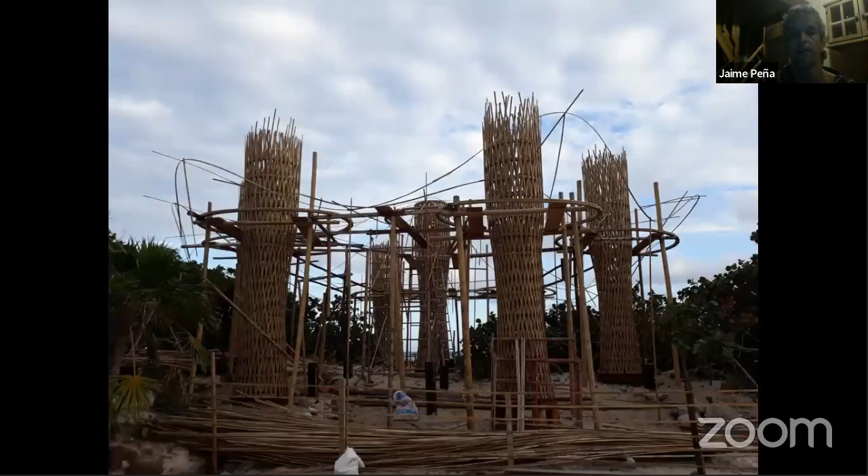In this picture, I will show you guys the most important draw that we did in the construction, this line. This is the guideline for the constructors, for the builders.

Can you hear me? Sorry, I lose the connection for a little bit. Yes, okay, I told you that this is the guidelines.

This is the split. It's like the sky is your paper, and you need to draw the guidelines for the design.

Sorry, I have a little problem. The presentation is stopped. Give me a second, guys. I don't know what happened, but my presentation is stopped. Maybe it's my laptop.

You can see all the guidelines, all the splits in the ground, and we started to create the surface for the roof, but that will be like a diaphragmatic structural surface. I don't know.

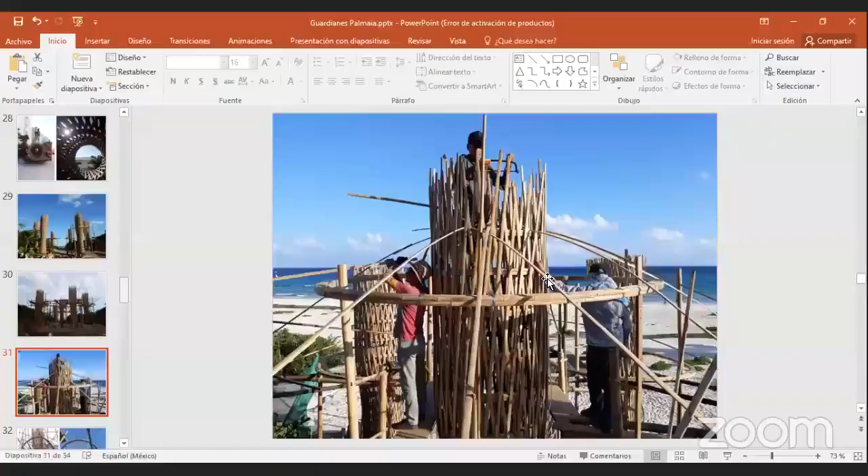So this project is in front of the beach, as you can see, we are working with a beautiful view. The most interesting thing is this project got 3 hurricanes in the last year, and it's totally in perfect condition, the structure, because the system for the form finding to understand how the geometry of the hurricane operates helped us to build the structure better in front of the hurricanes.

I will show you without full screen, okay Eugene, because when I have full screen it's blocked. Sure, go ahead. Okay, we are going on and putting more splits and more splits and more splits.

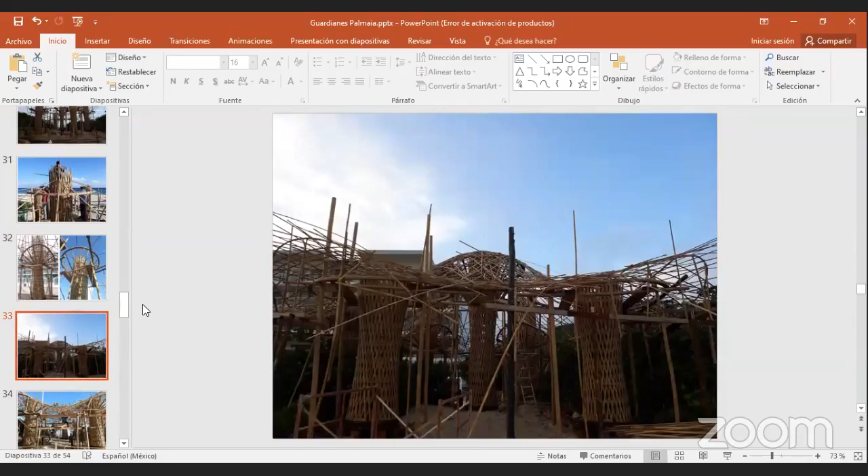This work is like a therapy, guys, for our workers, you are working the patience, because it's the same fractal, the same element. It's like a bird's nest, the same work like a bird's nest, and you are weaving and weaving and weaving, because Arquitectura Mixta is working in weavings. We are weaving with architecture, we don't build with architecture, we are weavers, and it's so beautiful because it's like a message as well for the people, talking about the collaboration in the world, about how the universe operates.

This process is weaving, putting more splits, because we have the geometry, we have the guidelines, and right now it's only to follow these guidelines, to follow this geometry and to understand how the structure will win its force, will improve the force and the inflections and other elements.

In the universe and in biology there are very different systems. One of these systems is the branching system. The branching system is the most efficient system to connect energy, to transport energy. You have the branching system in your lungs, in your blood, in your circulatory system, and at the same time in the tendons, in the roots, in the placenta for babies, and in the way rivers flow.

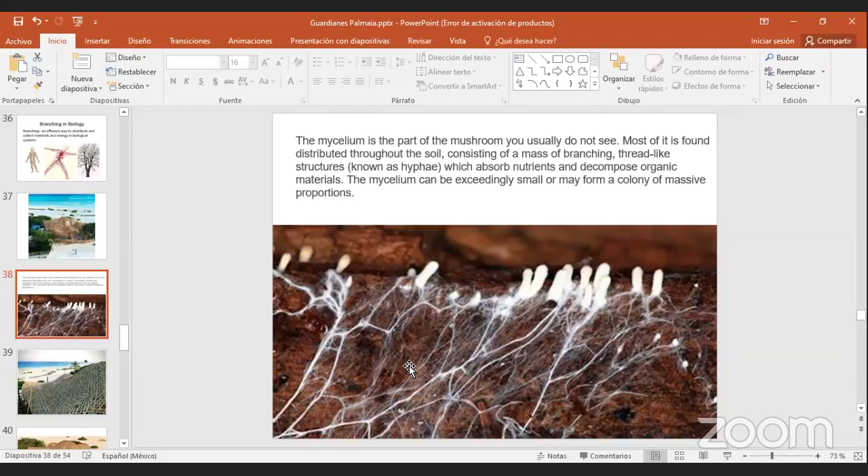This is finally the shape of the texture that the roof has, with all the splits, something like this as well. We have the surfaces created.

One thing in this project, the client doesn't want to cover it. I tried many ways to convince him to put some element for coverage, to have more protection, but they love it like this. For them it's a sculpture, and they're willing to replace it in 8 or 10 years.

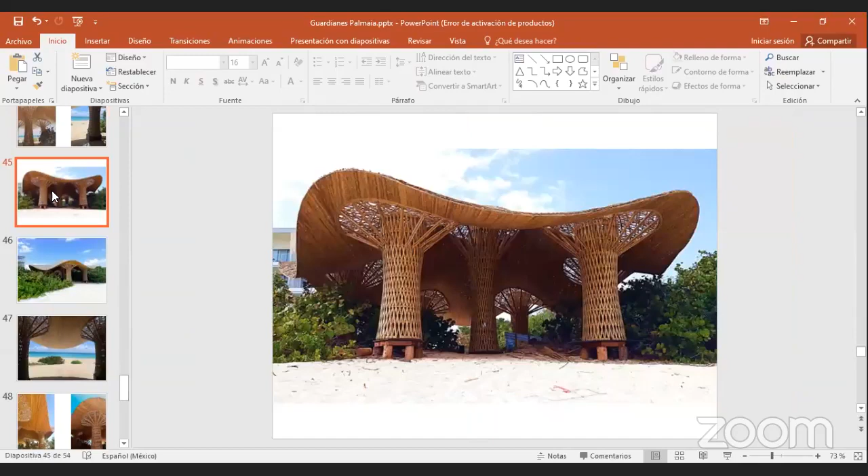All these structures are made with the same piece, a fractal piece, with one fiber. It's amazing, the concept. The flexibility and the high resistance to tension, to traction forces, is amazing as well, along with the capacity to have beautiful curvatures.

So interesting, the system - the structure has no floor. The flooring is the beach, it's the sand. It's like a connection between the beach and the interior of the hotel.

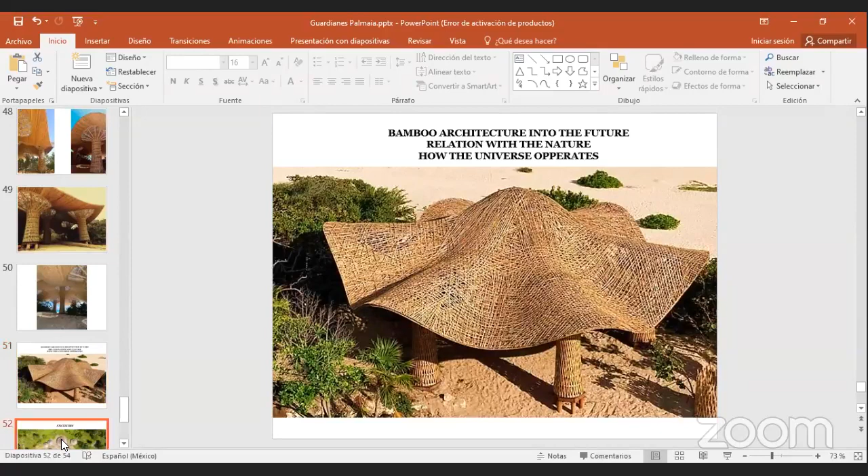How is bamboo architecture into the future? I think to understand the future, we need to go back to the origin, to our ancestrality, to understand the pure knowledge in the origin. It's like going back to the womb, to establish a beautiful relation with nature, because we are nature, living inside nature, in the middle of it. It's important to understand how the universe operates, because we live in the universe, we live in ancestry. It's necessary to go back to this ancestrality, to understand how our indigenous cultures put their structures on this planet, like the Kogi in Colombian indigenous culture - so very beautiful.

Thanks a lot for the opportunity, Eugene, and congrats to the other speakers. As I said at the start of my presentation, I feel so glad right now to be here in the middle of this big architecture community around the world, and to put Arquitectura Mixta at this level with this kind of projects. Thanks a lot for everything.